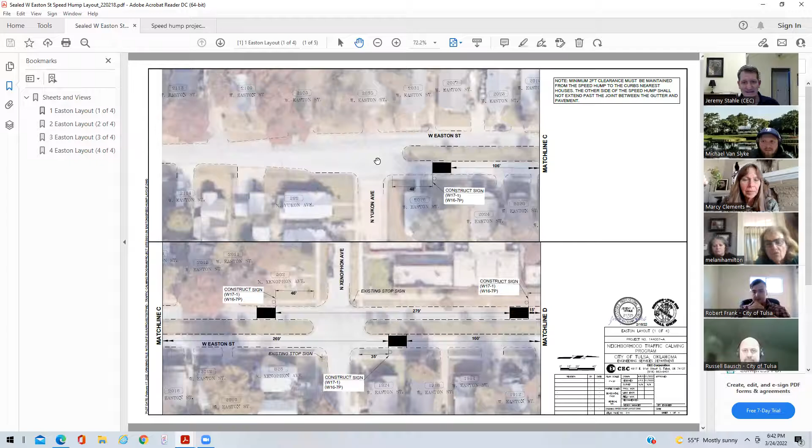Did we have this go all the way to Gilcrease Museum Road, or just Yukon? The petition went all the way to Gilcrease, so those were included in the properties and residences that were looked at. But as soon as we got into this next step where we designed it, we had to exclude that because it's not curb and gutter through that stretch. Got it, thank you. You're welcome.

All right, so we are starting on the west side. You might notice on these plans the numbers up here - that's the street address. Every now and then there's going to be one or so off; this is the best we can determine off of Google Earth and so forth. These show where the speed humps are located with respect to the radiuses at each of the intersections, and we show distances between these speed humps. By the way, the match line C on the right side matches line C on this next view on the bottom left. So we're starting west, which is to the left, and north is up.

To give you an idea of where that is: with the median in the middle of the street between Yukon and Quanah, we have to construct speed humps on both sides of the street, and they don't line up for various reasons, and they don't have to for that matter.

The ideal spacing between speed humps is between 200 and 600 feet. If you extend it greater than 600 feet, people will gun it between them and start speeding up in between the speed humps. So the city has a layout design guide we utilize, optimized to prevent that speeding, that gunning, in between the speed humps. We try to keep them between 200 and 600 feet, so you'll see the distances go that way.

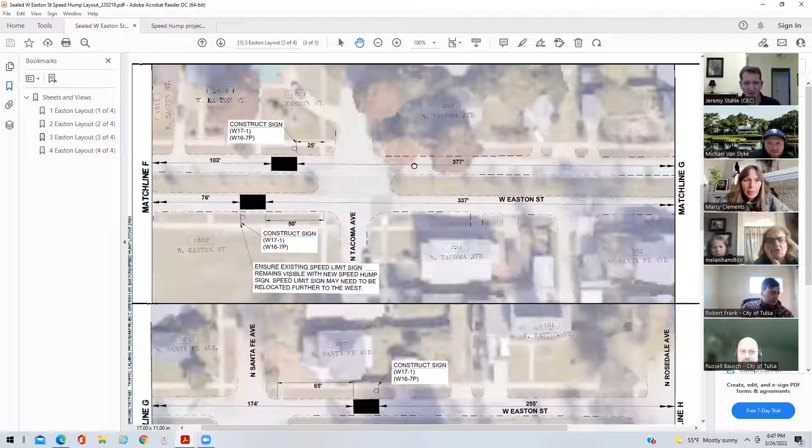But in this case, I don't believe we had any distances that exceeded the 600 feet. Moving down to this next view, we've got a couple speed humps in between Vancouver and Union as well. And then our last part here, we've got some just west of Tacoma.

Can you go back to the one? Sorry, the previous one. No problem, back up here to this view, from Vancouver to Union. Yes, yes, there you are. Down here. There you are.

Any questions about where those are between Vancouver and Union? No, I just hadn't had time to focus. Sorry. Sure, thank you - no problem.

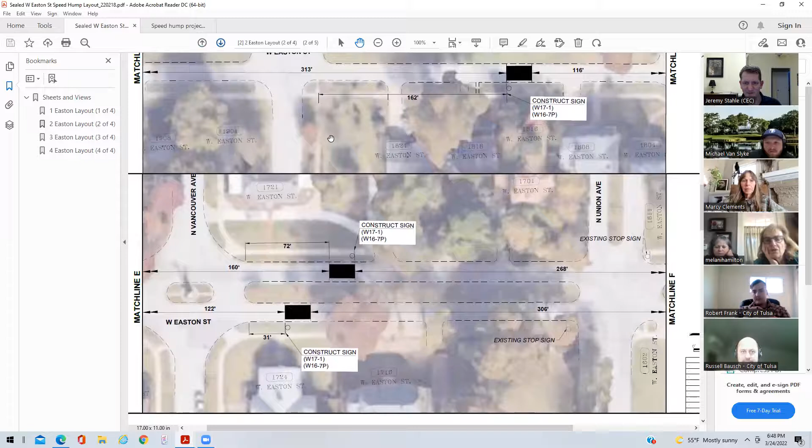So we do have stop signs at the Union Avenue intersection, and that's why we don't have some of those closer right in this area, or when we move to the next sheet, just east of match line F. That's why we have these a little bit further away, closer to Tacoma than at Union.

And so match line G then moves down to here, so we've got a couple speed humps in between Santa Fe and Rosedale.

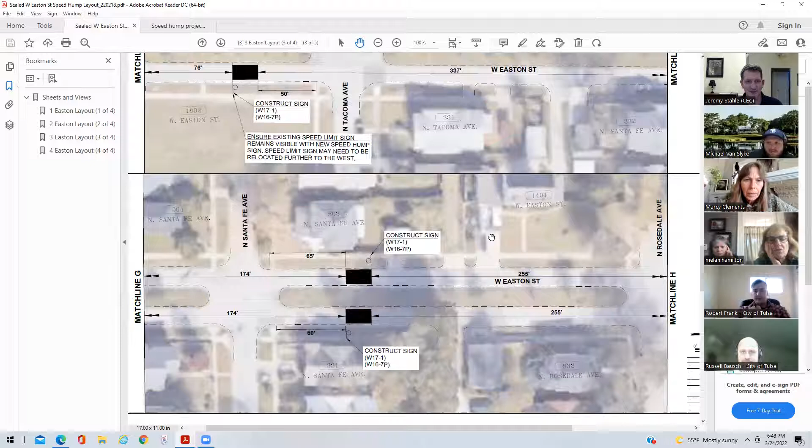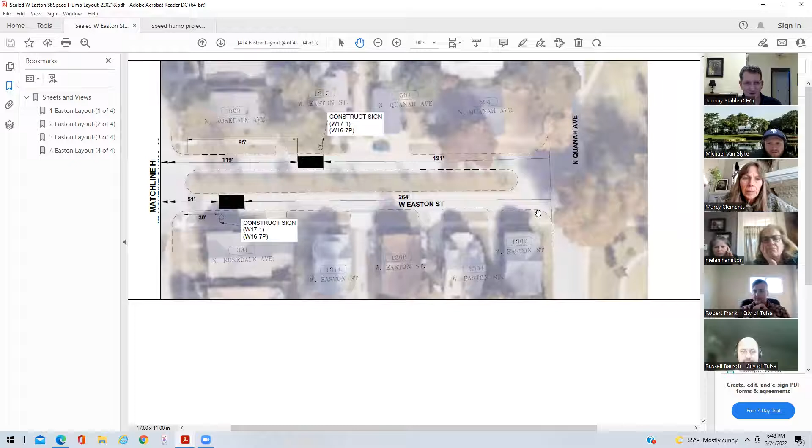And then our very last one, we'll move to that right in this area. Okay, any questions over the layout and where those speed humps are?

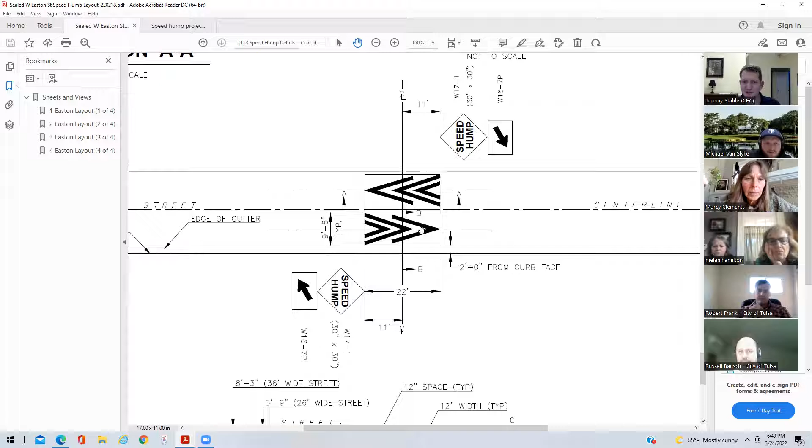All right, I'm now going to move on to the detail of what these speed humps look like. This section right here, right in the middle, is like a plan view, as if you were up in the air looking down on the speed hump. This speed hump is 22 foot long as you're driving down the roadway, and it goes from one edge of the street to the other, minus a 2 foot gap between the curb. This section shows a 2 foot gap between the curb and where a 24-inch taper begins on the speed hump, so it's going to taper up.

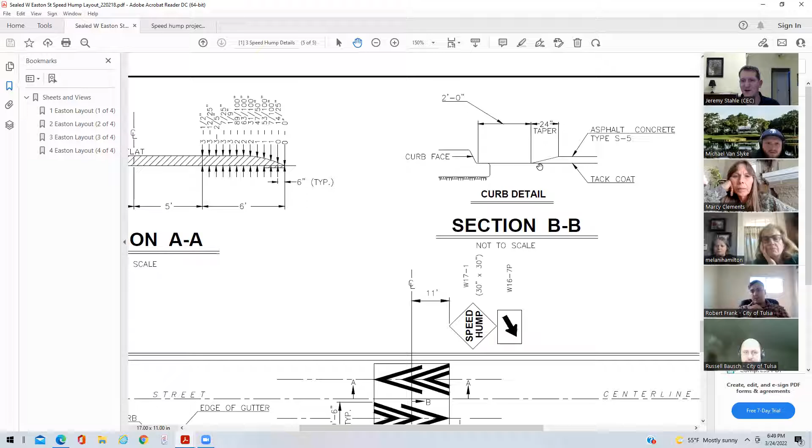The reason for that is you don't want a quick abrupt drop off, or if there's a bicyclist in that 2 foot gap and they hit that, you don't want them to hit a sharp face. That's why we've got a 24-inch taper there. So this shows what it looks like, and it also shows the placement of the signs.

So we have a sign on each corner as you're approaching and driving. There will be a speed hump sign with an arrow pointing downward at an angle, pointing to where the speed hump begins. The placement of that is typically right at the corner of that speed hump and just a few foot behind the back curb.

The reason why we put them there is twofold. One is that sign will last longer typically than the pavement markings, and the city has a program to replace pavement markings, and so they may fade over time until the city gets through their cycle to come back and paint those again. But that sign will also give another visual cue that there is a speed hump.

The other reason for the sign being right there is if the city is going through and plowing this for snow and ice, which doesn't happen very often but certainly has in the last couple of years, those plows know that there's a speed hump there and can slow down or make an adjustment to not damage the plow or the speed hump itself.

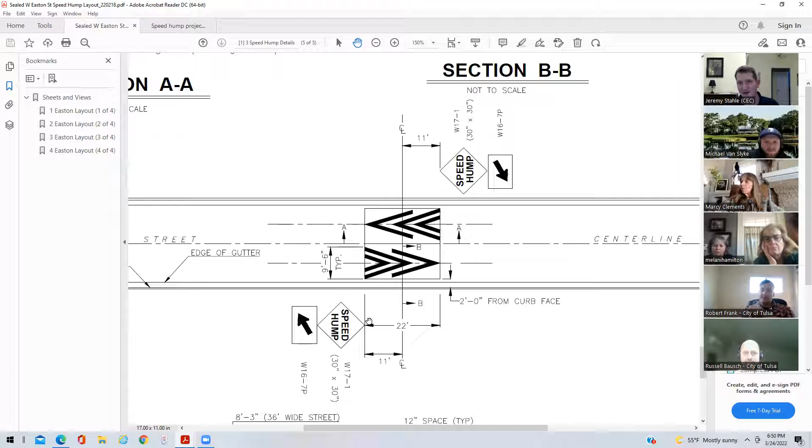Now we've got a cut view through here. It's called section B-B, and that shows this piece here. Section AA goes longitudinally through the speed hump. This is what the speed hump looks like if you were to make a slice right down the center of the road. Again, it's 22 foot long, but it's parabolic in shape. We've got a parabola here on the approach side and one at the exit, and then there's a platform at the top that's 10 foot wide.

The reason for this is it allows a vehicle to navigate over this speed hump without a jarring motion. You can drive over these speed humps going 20 or 25 mile an hour on most vehicles, and you don't feel like you're going to lose your axle or your wheel. You can drive over them at a pretty good clip and not get jolted. If you start pushing closer to 30 mile an hour, it will start to affect your vehicle and you could damage it over time. So you can drive the speed limit slightly lower comfortably.

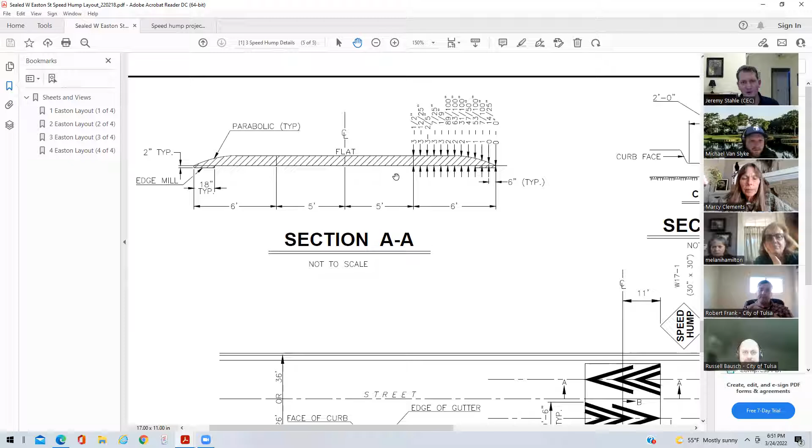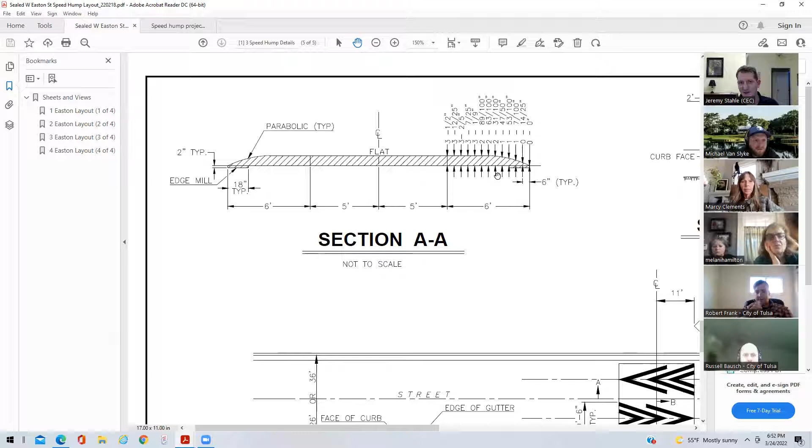I wouldn't hold a cup of coffee in your hand because it probably will spill, but other than that, they're not terrible to drive over so long as you're driving at or below the speed limit. In constructing these, on the existing pavement we come in and put a little 2-inch mill for an 18-inch strip across the street. That way the asphalt has a good tie-in section into it. It's like it forms what we call a butt joint tying into it, so it will meet the existing asphalt at a good piece.

The next thing I want to point out are the pavement markings. These are big, bold chevrons painted on the street, another visual cue to let people know there's a speed hump ahead, and once they're painted, they stand out really well at night. So you've got the sign and the pavement markings to let people know there's speed humps there. It looks really good.

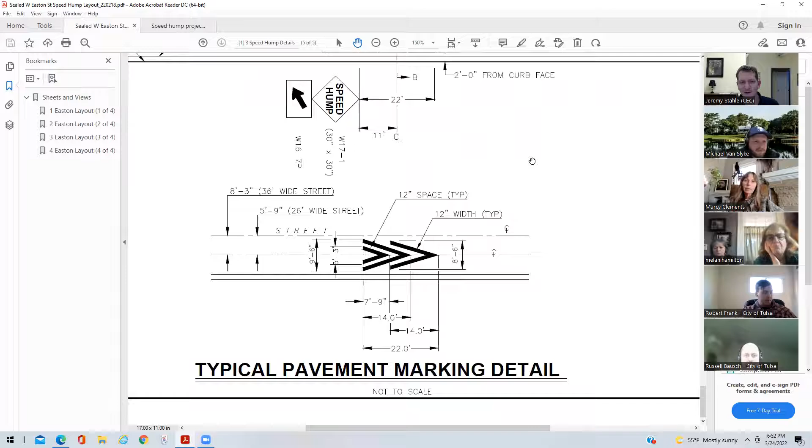Any questions over these details? What color is the paint? The paint is white.

So I alluded to this project being constructed under the Improve Our Tulsa 2 funding, but there's a catch in there. It's actually going to be constructed in two different time periods, and that is where Robert Frank is involved. Robert Frank is a project manager for a new non-arterial maintenance zone project for the city of Tulsa in this area. So what that means is I've got these areas that show orange on them, along Easton, starting west of Zenith, stretching all the way to Union Avenue.

So that part of this project, we're going to hold off constructing those speed humps, because when that maintenance zone project goes through the design process, their consultant—is that BKL, Robert? Yes, it's BKL. Thank you, that was a different project. So BKL, another consulting firm here in Tulsa, is designing this project.

And so at a minimum, there would be a mill and overlay over that stretch of the street. Is that right, Robert? That is correct. So we do not want to construct those speed humps because probably next year or shortly thereafter, they'd have to be removed and replaced.

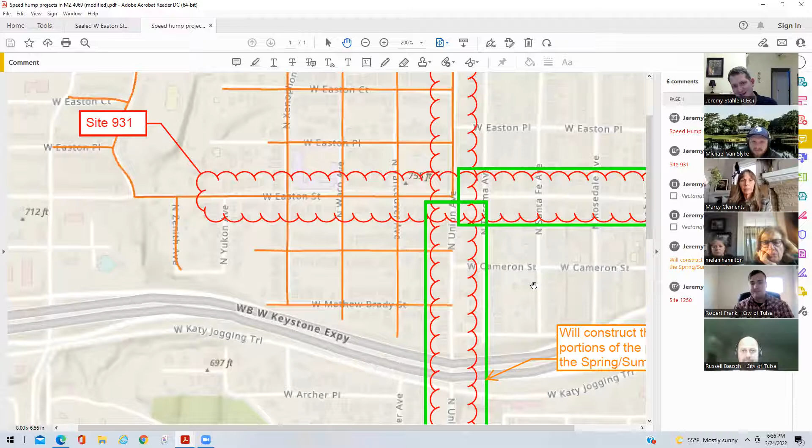Now, what that means for you all on this project, and for those interested in the stretch on Union, the same thing will happen there. The city of Tulsa's own streets and stormwater group will construct the speed humps that are not inside that maintenance zone project area—between Union and Quanah—hopefully later this spring or early summer, depending on how many projects are ahead and what work they've got going on. The stretch between Union and Yukon will be constructed by the city's contractor selected for this project during the bidding, anticipated in 2024.

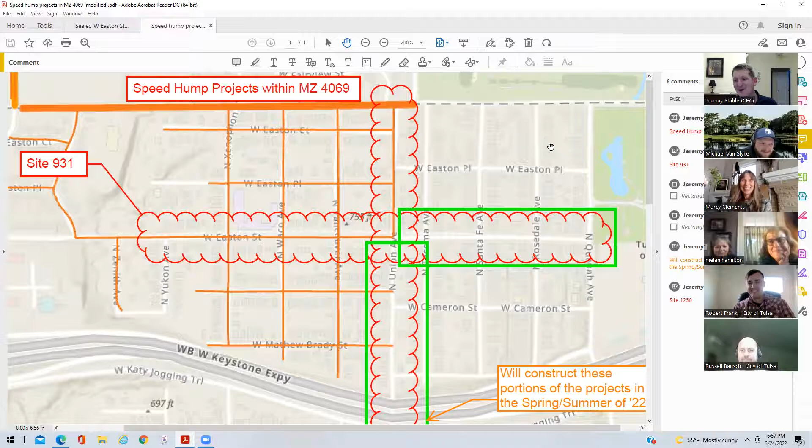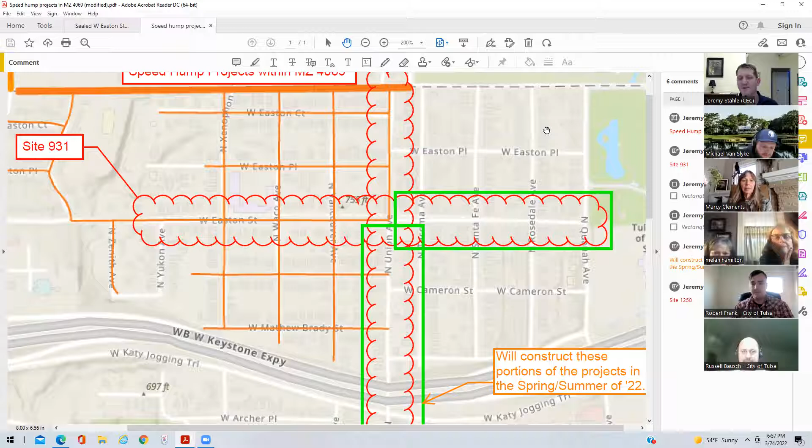Any questions? They won't forget to put the speed humps in after that, will they? No, I promise. Robert's on it, I'm on it, Russell and Michael are on it. We're going to make sure they get constructed. As a matter of fact, those plans will be handed over to BKL so they're aware of them and put them in the same location as we've got them, including them in their plans.

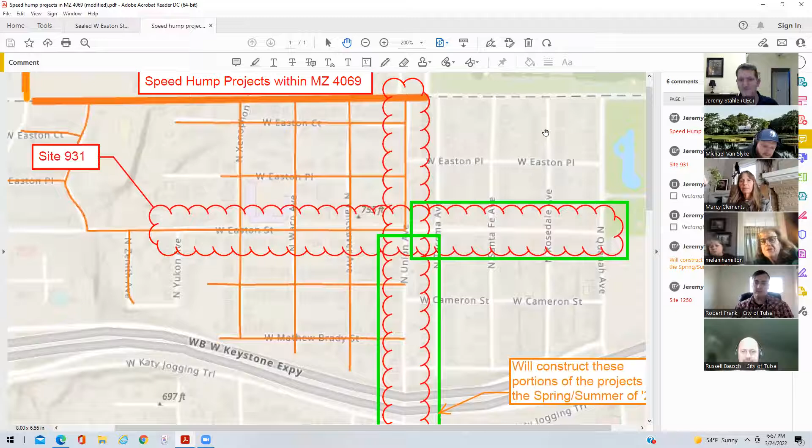It's the same thing for North Union. Even though we're going to have the meeting in a couple of weeks for Union, they won't be constructed up there from Easton up to Edison, but the stretch south of there will be constructed on the city's portion of that project. Those should be constructed in the spring or summer, and we'll talk about that in the public meeting in a couple of weeks.

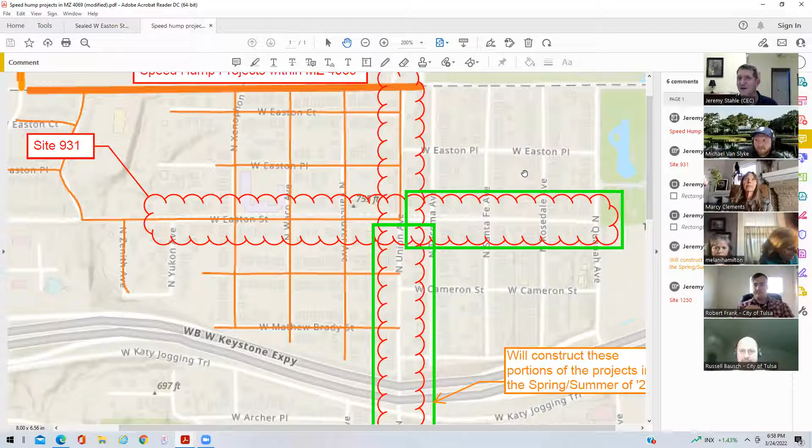Oh, the Union Street public meeting is coming up. I believe that's on April 7th, a Thursday night. I think it's the first full Thursday, so that would be the 7th since the 1st is a Friday. So that's April 7th. Any questions over timelines on this again?

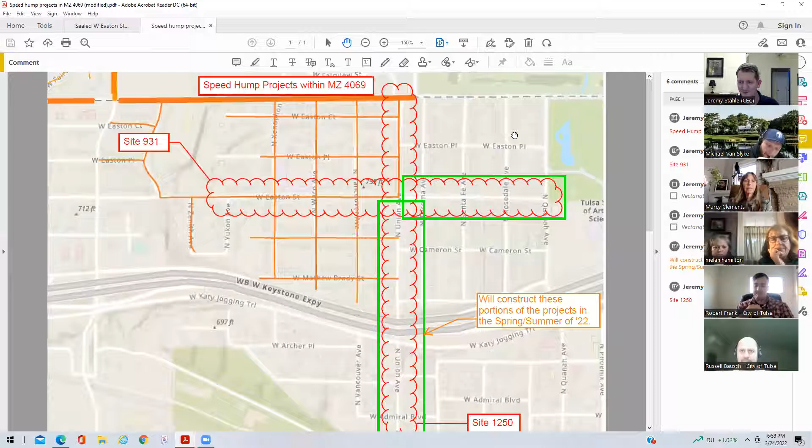Very good. Any questions over the speed hump locations again? I do have a question that Melanie was concerned about, but I think I'll answer it myself. I bicycle a lot on roads that have these on them, and it doesn't seem to be a problem for bicyclers, but I thought I would double check with what you think.

Yeah, a bicyclist could easily navigate over these. I find them fun to go over, but they do have that gap between the curb and where the taper begins, where they can navigate to if they do not want to go over the speed hump.

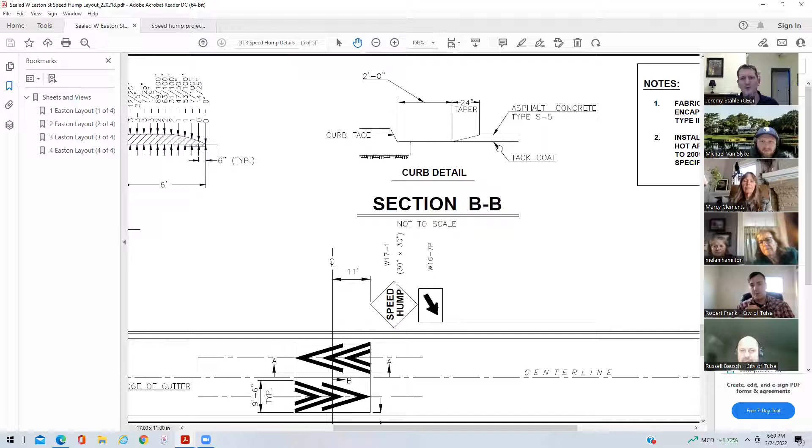And these don't have a space in the middle of the road like the earlier ones you said you don't like as much, that were made out of rubber or plastic. Oh yeah, those the city went through a lot of research, way back in like 2012 or so. It was a long time ago. Went through the different types of speed humps, speed tables, speed bumps, you name it. And the speed hump was determined to be the most cost-effective way to slow traffic speeds down.

They last a long time too. They're made of asphalt, not plastic, and they're not the speed bumps you see in commercial parking lots. I hate those things, they really jolt your car when you drive over them. These, again, you can navigate through pretty easily.

Yes, Marcy. Several years ago, I went to the airport and I didn't know they had put those speed bumps in, and I hit one of those and almost took off.

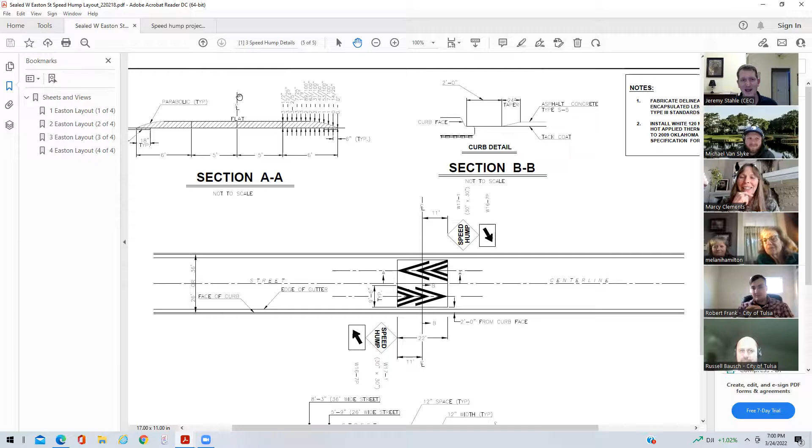Those are what we call speed tables. They're made of concrete and have a sharp edge, so where the slope comes up, it hits a flat plateau, and they commonly use those for walkways. It's good for pedestrians walking across because people really have to slow down to come to those things, but it is a very sharp edge. It's easy for a contractor to form because it's concrete that way, but it is not a smooth transition. The parabolic shape that we have on these here makes a very smooth transition to go over.

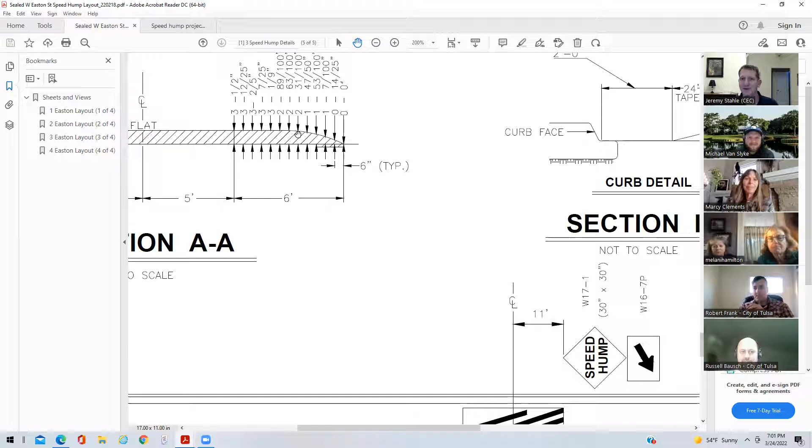So these are not that high. I do believe these things go up 3.5 inches, and those speed tables may go up about 4 inches, a little higher, I believe. But the difference is this has a smooth transition, and those have a sharp angle on them. You have to slow down probably about 5 miles per hour to go over those without jolting your car badly. These, like I said, you can drive over at 20, 25 miles an hour and not feel a massive jolt on your car or your person.

Well, I do have a friend in Maple Ridge where they have those rubber humps, and they're divided, so they're not in the middle and not on the edge. So sometimes if you have a really wide car, you can't even be on that bump. So I'm glad we're not getting those rubber ones.

Those are terrible. Ugh. I understand.

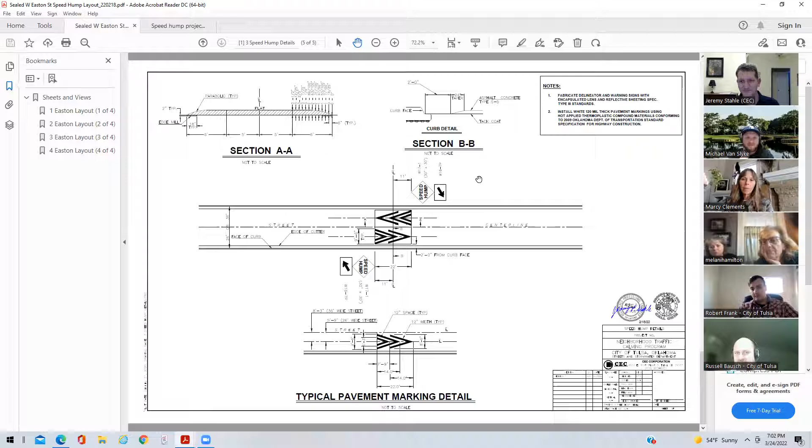Hey Virginia, back to your question about the bicycles. We actually met with the BPAC, the Bicycle and Pedestrian Advisory Committee, prior to changing the design to get the 2-foot separation between the curb and the beginning of the speed hump, and also the 2-foot side taper. It used to be an 18-inch gap with a 1-foot taper, and when we talked to people from BPAC, they said that was a little too steep and hard to go over. So we went to different locations in Jenks and Tulsa and other places and checked out the speed humps they had there. We actually rode bicycles over them to see which ones were easiest to work with, and that's how we came up with this design, with the 2-foot gap and 2-foot side taper. We got BPAC's input, and they seemed to like this too.

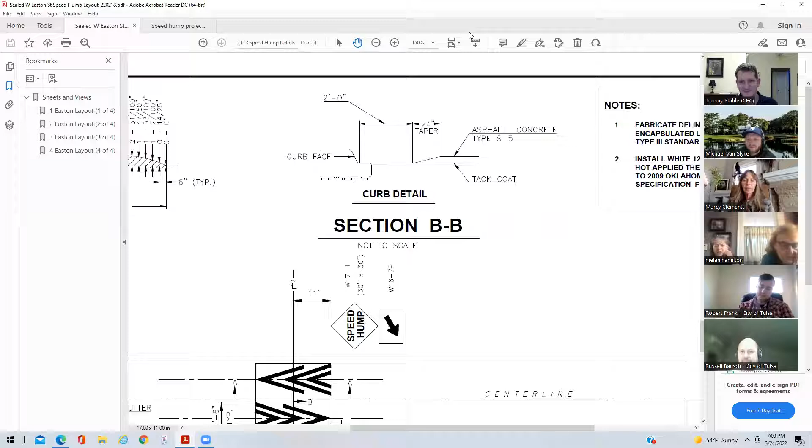We have a lot of cyclists in the neighborhood, and they do go up and down Easton because it's kind of a challenging route for them, so I'd hate to lose them, but I don't want the cars going fast either. It sounds like it won't be a problem, not 50 miles an hour down a non-highway. That's good to know. I've never had trouble biking over the ones on 18th Street, but it's nice to know that you researched it.

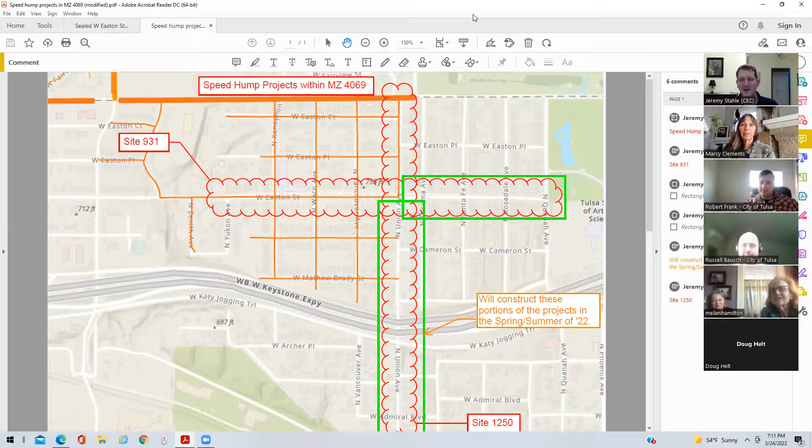Excellent, very good. I appreciate you asking about it. It's a great suggestion to send out that mailer and map to let people know part of this project will be constructed in the near future, and part under this project. Otherwise I might be getting a lot of phone calls. You probably would, and we want to make this easy for everybody and very clear how and when these are going to be constructed. Also people will need to know when they won't be able to drive down the street and get into their driveway because the road will be torn up and resurfaced. That is, we'll let Robert and Doug handle that at the public meeting, because it'll be a little more invasive than us constructing these speed humps.

Good point, Marcy. There typically is water line work done with these projects at times too. I don't know if there's water line work on this project, Robert, or not. Yes, there will be. So driveways are ripped up at times, but it's really nice once the project's done, because the streets improve and can extend another 20 plus years or so. It'll be great for this neighborhood. And like I mentioned, it will hopefully give back some of that curb height when they do the edge mills at the gutters, which would be really good.

My driveway's old, so it could be improved, definitely. Mine too. Feel free.

Absolutely. All right, Doug, I appreciate you joining us. Thank you so much. I had Robert lined out for it, and then when it was my time to call, I fully forgot. Well, I joined late and thought you'd already be done. We've had good participation and some good questions, which is great, especially with the video format, because people watching on video will probably have similar questions, and if they watch the whole thing, hopefully their questions will be answered. So I waited until I got to my house to call in, I'm not savvy enough to know how to hook up my video.